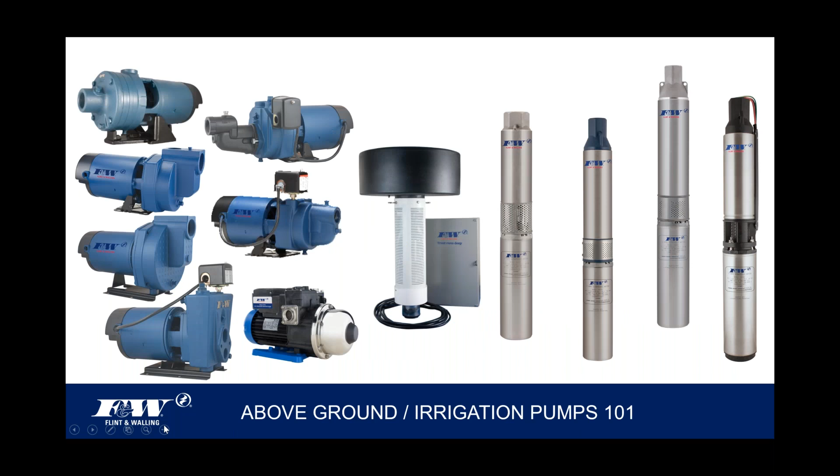So with that, we're going to go ahead and get started. Get my triggers here to work okay. Let's see. There we go. I'm going to pull a highlighter up here real quick. Okay, so

What you're going to hear today frequently is two types. When we get a brand new person coming into the industry, I'll start them off this way. I'll say there are two types of pumps associated typically with the water well and the irrigation industry. Well, one is pictured on the left-hand side of your screen, and that's what we're going to be talking about today. And these are what's called above ground pumps.

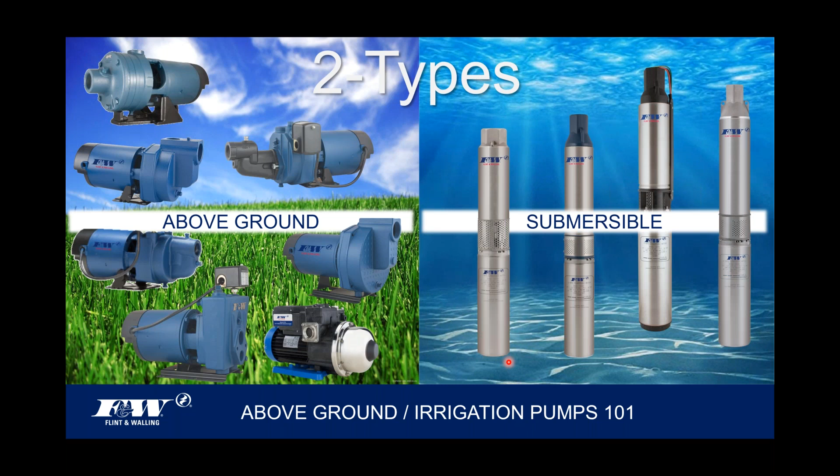And of course, the second type of pump that's typically used is referred to as submersible. I have sessions coming up in the web conference schedule that will go into submersible pumps in pretty good detail. But today, like I said, we're going to talk about above ground pumps. And in so doing, two types is something you're going to hear me say quite frequently. So with that, we'll go ahead and start with above ground pumps.

There's two types. So when we look at above ground pumps, we're going to categorize these into two categories. One is going to be referred to as jet pumps. And then, of course, the second category will be referred to as centrifugal pumps. And again, the whole objective behind this web conference today is to be able to look at these pumps visually and identify what type of pump they are. So with that, we're going to start off talking about jet pumps.

Now, I'm actually conducting this web conference from our training center, and I don't have the luxury of a preview slide, so I'm going to see these slides kind of come up at the same time you all do.

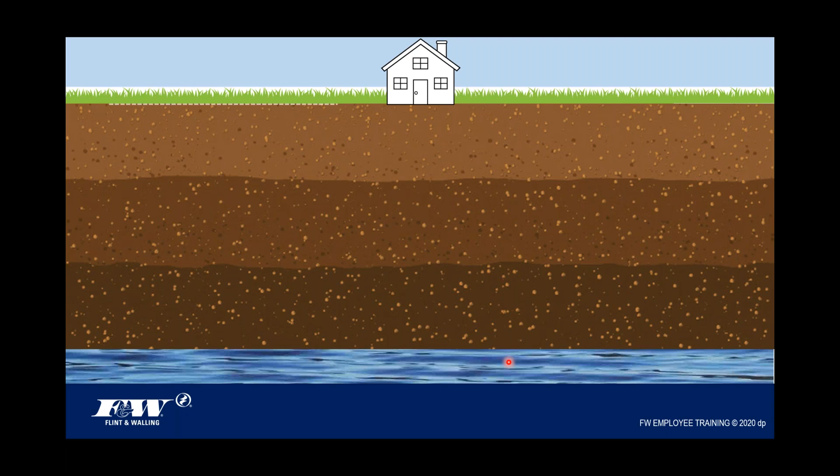But when we talk about jet pumps, when you look at a well, and that's where the majority of jet pumps are going to be used. They're typically used on well systems.

If you had a house in the country back in the 50s or 60s and you had a jet pump, that's how you got water in. But the thing that I want to talk to you about here when we talk about above ground pumps, and particularly when they're used on a well,

if you call me and want assistance in sizing a pump, and you've got a well, one of the first questions I'm going to ask is how far is it from the surface down to the water level in that well? How far is it? And that's going to be a vertical measurement, and it's going to be measured in feet.

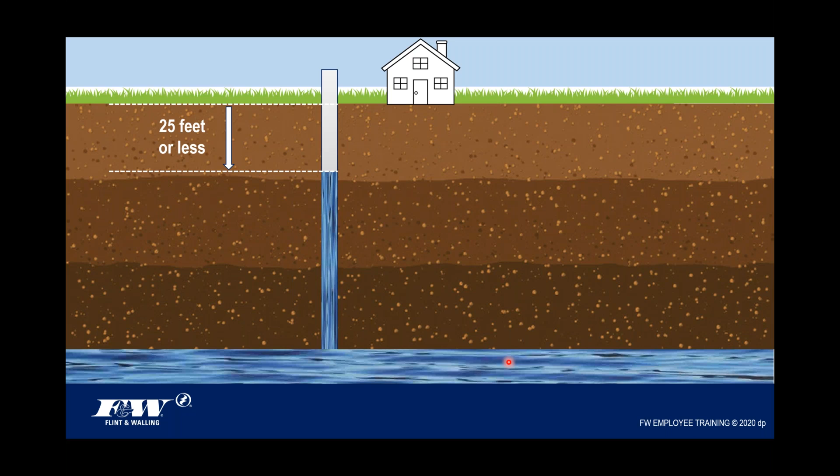So, for example, if that distance is 25 feet or less, that's going to be referred to as a shallow well. That's not a Dan Painter term. That's an industry standard term that most every pump company acknowledges. And so when we talk about shallow wells, what we're talking about is a well where the water level is less than 25 feet from the top of the well, from the top of the surface.

All right, so that's a question I'm going to ask. The second, obviously, question is if that water level is more than 25 feet away, then this well is going to be referred to as a deep well. So therein lies the difference between what is defined as a shallow well and what is defined as a deep well. And these are important to know when sizing and selecting above ground pumps. So less than 25 feet is a shallow well, more than 25 feet is a deep well.

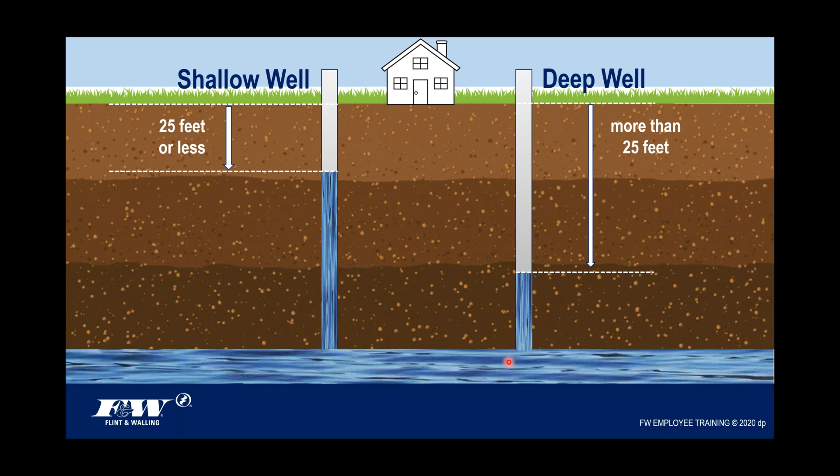Now, circling back on our first topic of above ground pumps, we're talking about jet pumps. So why is this important to know? Why is it important to know how much distance there is to water, whether it's a shallow well or a deep well? Well, there's two types of jet pumps. There is a shallow well jet pump, and there's a deep well jet pump.

So I'm going to circle back on that in just a second, but here's a question that I get asked occasionally. Why are they called jet pumps? And sometimes I've asked that question. Here in our training center, pre-COVID, we'd have this place loaded with 30, 40 people in here. And I'd throw that out there. I'd say, hey, anybody in this group know why a jet pump's called a jet pump?

And I had an old boy raise his hand in the back of the classroom one day, and he said, hey, Mr. Painter, I know why they're called a jet pump. And I said, why is that, sir? He said, well, did you ever hear one run? I kind of chuckled at that, and I said, well, I'm not sure where you're going with that. He said, well, it sounds like a damn jet. I'm thinking, well, he's not talking about our jet pump, because ours is the most quiet thing you'd ever hear run.

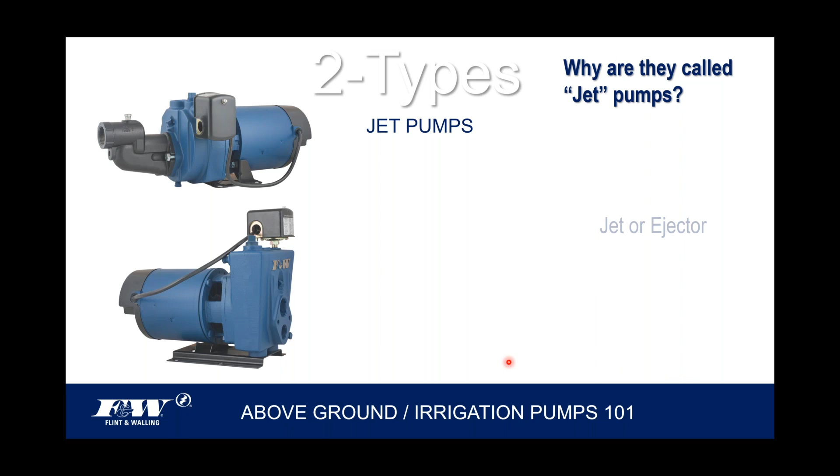So, everybody's got their own perception, and I'll be honest with you, this is an opinion I have. But if we look at why they call it a jet pump, it's because the pump must be accompanied with one or the other of the two components showing up on the right-hand side of your screen. These are called jets. Some old timers like myself might refer to these as ejectors, but nonetheless, there's two types of jets. There's a shallow well jet, and then there's a deep well jet. So up the top here is the shallow well jet.

If you look, it bolts right onto the front of the pump. So move over to the left-hand side of your screen. You can see that this shallow well jet or shallow well jet adapter bolts right to the front of the pump. And that's what makes that a shallow well jet pump, where the other one down below is referred to as a deep well jet. The shallow well jet's mounted horizontally. The deep well jet is going to be located much further down where that water source is at. And so in that case, it'll be mounted vertically in the well.

So I'm going to get back to that here in just a second. But that's why I want to know how far is it to water, so I know which jet pump to pursue, whether it's going to be a shallow well jet pump or a deep well jet pump.

So those are your two ejectors. These are jets, and they must accompany the pump in order for the pump to be able to lift water out of the well and pump water into the home. And so these jets are a component. Maybe that's a reason why they call that thing a jet pump. It's just an opinion.

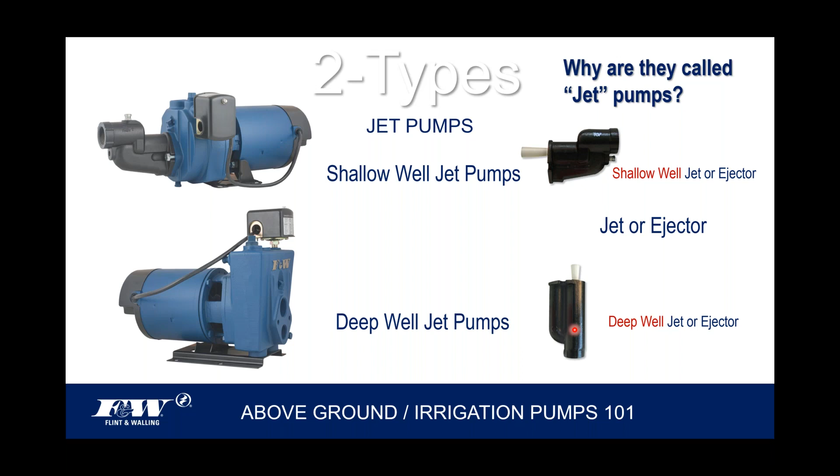Sometimes when I'm in classroom, I stand in front of the classroom and I'll kind of role play. I'll tell the folks, look, if there was a hose bib in this wall behind me and I put a four foot piece of garden hose on there and I open that hose bib all the way up, my guess is all you guys in this front row, you're going to get soaked. I can soak you all down. But back there in that second row, third row, I may get you from the waist down, from the knees down. It all depends on how much pressure's coming out of that valve.

But if I put my thumb over the end of that garden hose, and like I said, everybody's done this, now nobody in this classroom would be safe. I could shoot that water all over the whole entire classroom, soak everybody. So what happened when I put my thumb over the end of that garden hose? What changed? Here's what changed. I increased the velocity of that water coming out the end of that garden hose by restricting the opening.

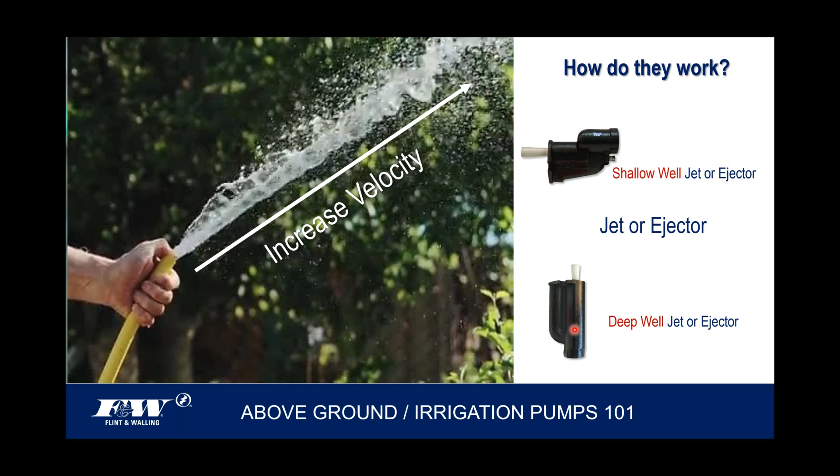Now, I'm thinking at this point, you're wondering, what the heck does this have to do with pumps? Well, let me give you one example. I'll make a little confession to you, I'm the father of 10 children. So I, in my time, have done 10 science fair projects. Let me explain one science fair project, because this is going to tell you how a jet pump can lift water out of a cistern, out of a well, whatever.

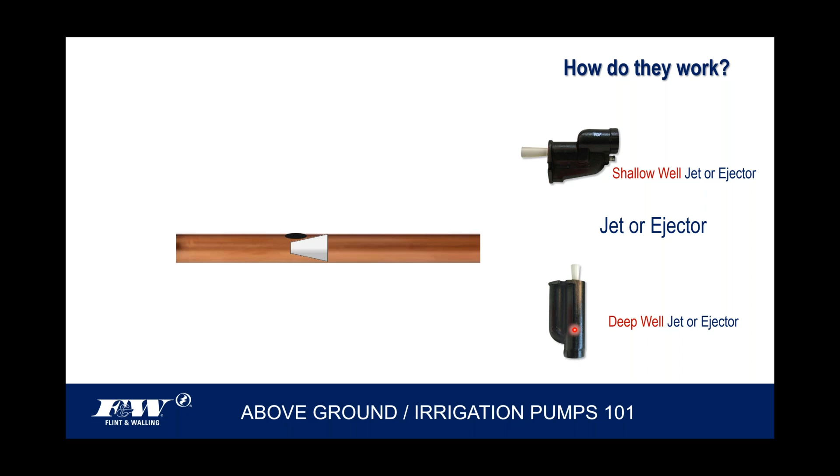I took a piece of 3/4 inch copper pipe. I don't know, this was probably 14 inches long. I drilled a hole in the top of it, and I pressed a nozzle into the inside of that copper pipe. Now, where that hole's drilled at the top, I inserted a piece of copper tubing. I kind of soldered it in there. So I created a Y-looking device here with a nozzle pressed on the inside of it.

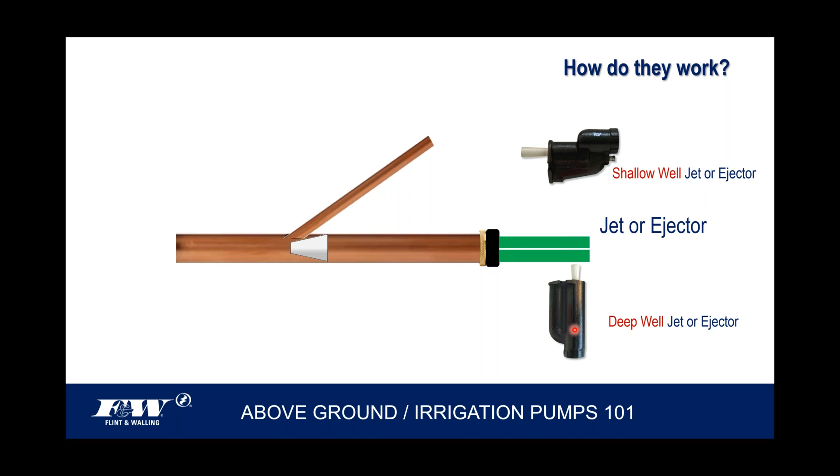I brazed a hose bib fitting on the end of that piece of copper pipe, and we put a garden hose on the end of that, and we walked this thing out in the backyard. I can't remember if it was one of my sons or my daughter, but we opened up that hose bib. And so that water came running through the hose, and it entered into that piece of copper pipe. And then once it got to that nozzle, we basically mirrored what was happening when you put your thumb over the end of that garden hose. That nozzle also restricts that opening. And as a result of that, it created velocity.

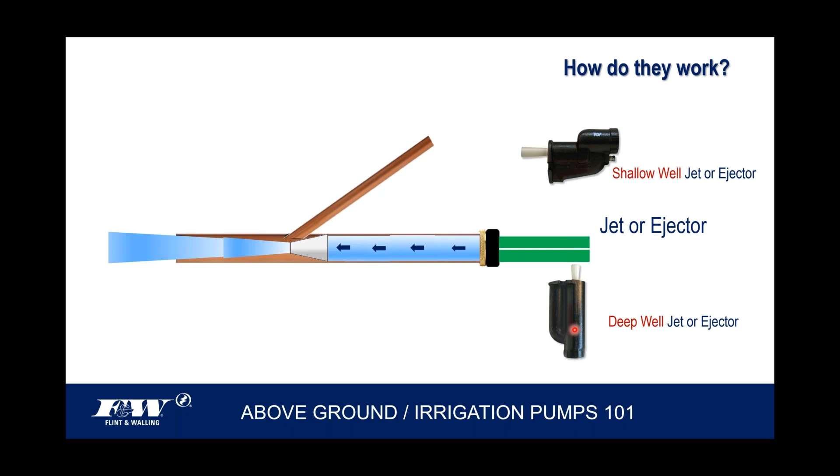We were shooting that water out of that 3/4 inch copper pipe probably 40 or 50 feet. But I asked my son or my daughter at the time, hey, while this is shooting all that water out over the grass, I want you to put your finger over that little tube. Go ahead and do that. Do you feel anything? And the response was, holy crap, yes, it's like a little vacuum cleaner. I can feel it wanting to suck my finger right down into that tube. Here is the lesson.

Velocity will create a suction or a vacuum. Let me give you more of a dated example of that. If I were in a car running down an interstate highway, and this is a little dated, and all the windows were up in the car and I lit up a cigarette, it wouldn't take 2 or 3 puffs and that whole car would be filled with smoke, right? I think everybody's probably experienced that at some point.

On the other hand, while I'm running down that highway with a car filled with smoke at 60, 70 miles an hour, all I really need to do is just crack the window a little bit. Don't have to roll it down, just crack it a little bit and watch what happens. You'll start to see all that smoke being pulled out of the car through that opening in the window. Why? Because you have a tremendous amount of velocity in the form of air moving past the opening in that window when you're running down the highway at 60 miles an hour. And like I said, it'll create that suction effect or that pulling effect.

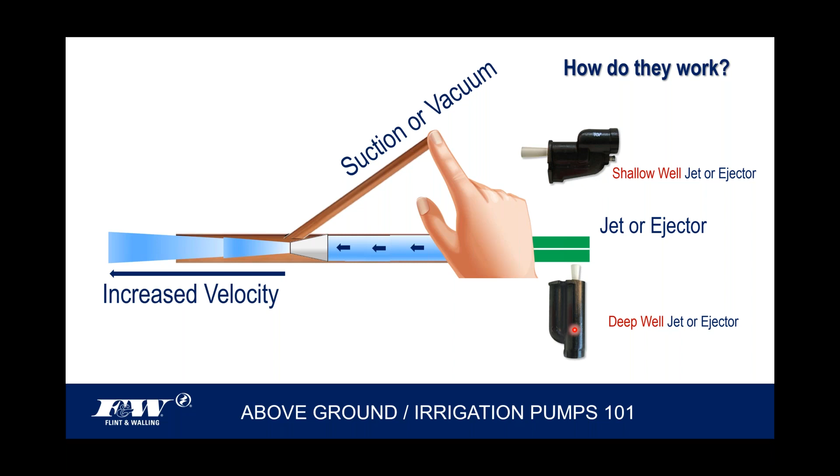We see this in racing all the time. If you're a race fan, these cars will come right back up on the back side of one another, and the lead car's the one that's doing all the work. The one that's right behind him, he can get off the gas. He's being pulled by that lead car. And so anyway, velocity creates suction.

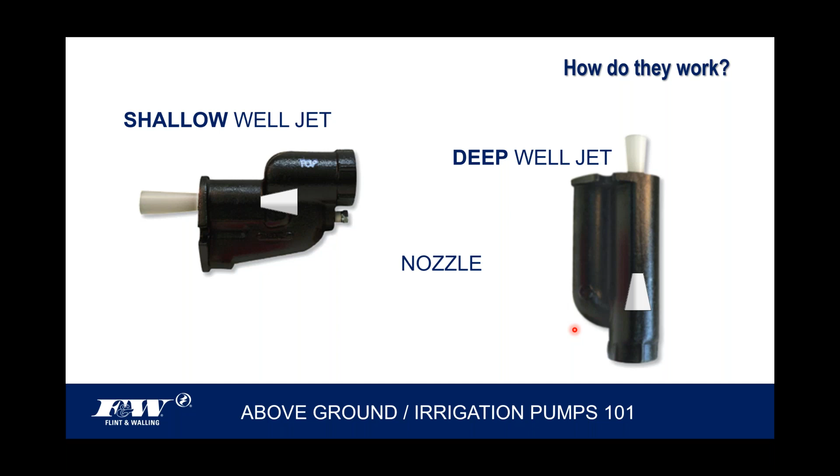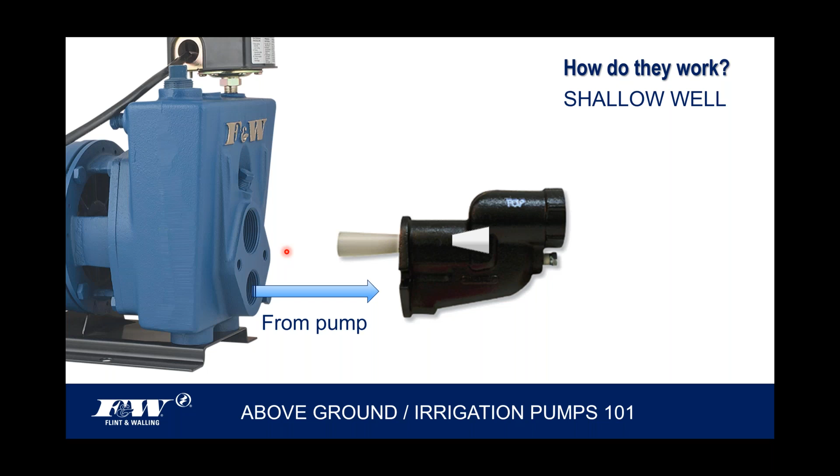Why do we do that? Because that water coming out that bottom opening is going to enter into this jet assembly. It's going to make a U-turn at the end, and it's going to be forced through that nozzle and that venturi, which creates the velocity, which pulls the water behind it. So you've got this water from the well or from the cistern that's being pulled in as this nozzle creates that velocity. So that's that pulling effect.

One thing I'll mention, because it's on my mind right now, I'd tell anybody that sells jet pumps: if you have a jet pump that is pumping very little or no water at all, the very first place I would suggest that you look is that nozzle.

So in the front, where my cursor is right now, is what's called a clean-out plug. This plug can be removed, and if any debris or anything foreign would happen to get lodged in that nozzle, listen, if that nozzle is plugged or partially plugged, then you don't create the velocity that you need. And if you don't create the velocity, you don't get the suction, and of course, then you don't get the pumping.

And so that clean-out plug is there so that should that happen, you can take that clean-out plug out, go in with a piece of copper wire, and hopefully be able to dislodge whatever may be in that nozzle without having to take this jet off the front of that pump. So that's what that's called right up front here. That's called a clean-out plug.

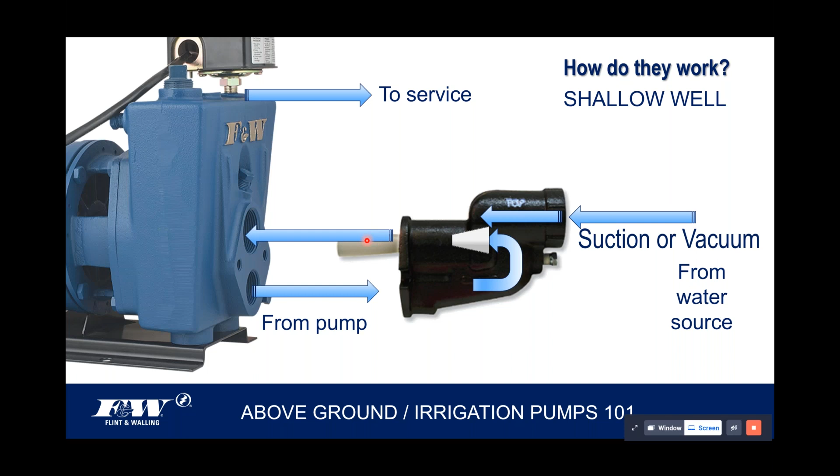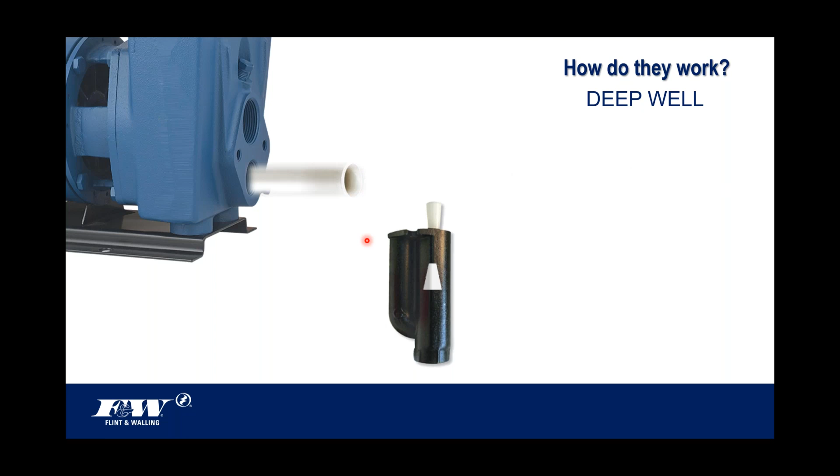In the case of a deep well jet, there's going to be two pipes running to the water source, all right? So we're going to hook a pipe up to that bottom opening, which is going to be the drive water, which is going to run down into the well near where the water level's at, and it's going to make that U-turn. This assembly is what creates that suction. So if that water is further than 25 feet away, the device that creates the suction, we better get it a little closer to that water source if we expect this pump to be able to work.

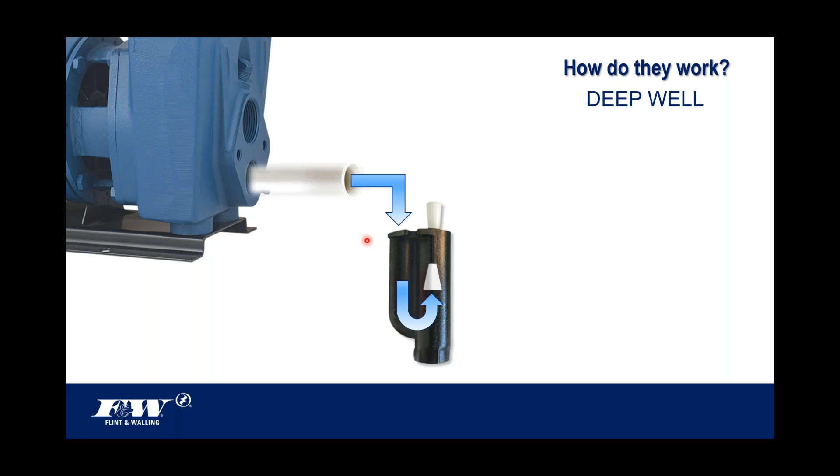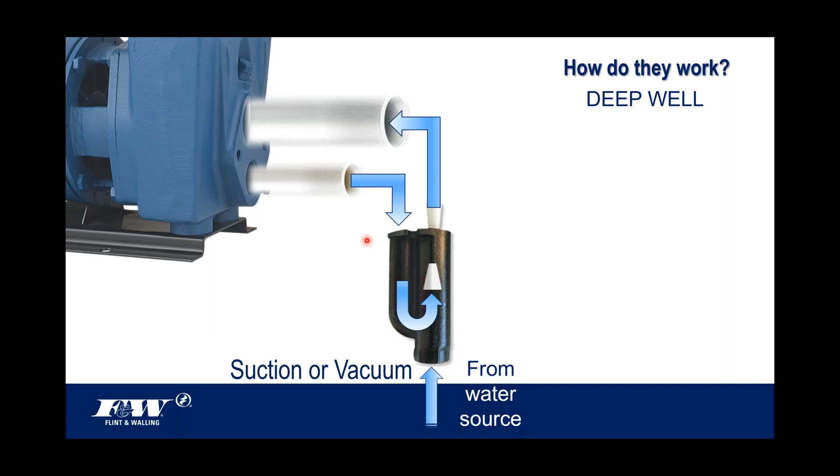So the bottom tapping of that pump there is going to tie into this deep well jet. And again, the top one is where the water is going to come out and discharge. So it's very similar to having this jet bolted right to the pump, but in this case, we have to push it down closer to the water source to get the water out of the well. And so we have to run two pipes down to that.

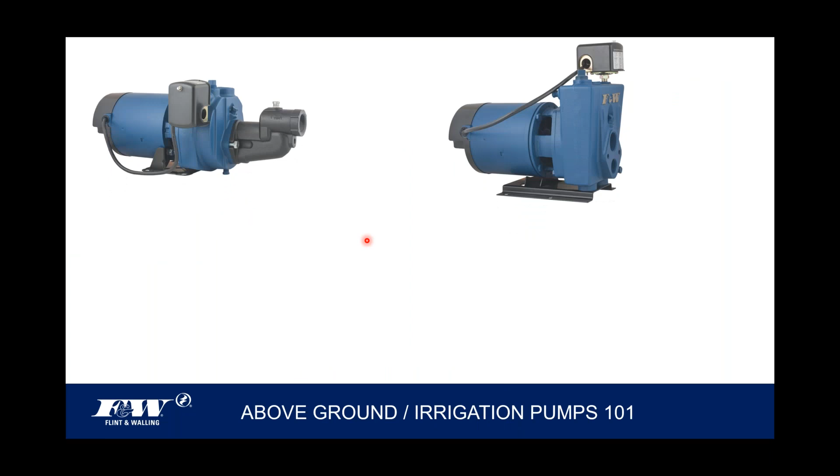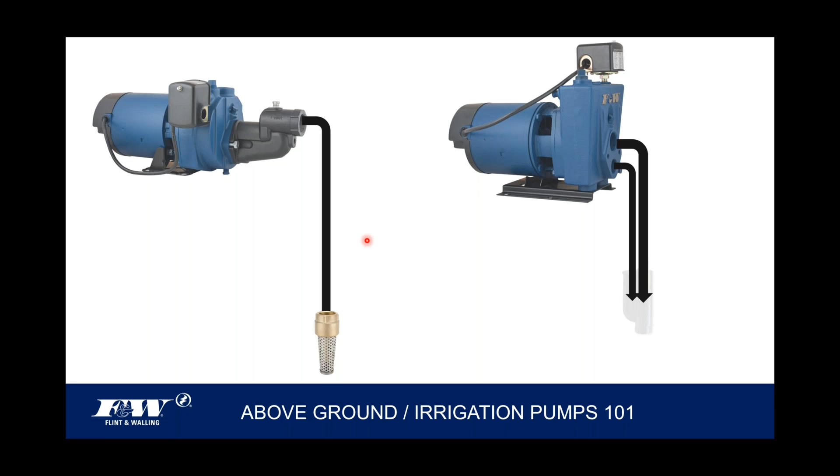So therein lies a big difference between a shallow well jet and a deep well jet. With a shallow well jet, you have one pipe that runs to the water source. That's it, just one pipe. But with a deep well jet, you've got two pipes. There's your visual. So if you see a pump with two pipes coming off the front of it, that's going to be a deep well jet pump. If it's just got the one, like you see on the left, that's a shallow well pump.

And of course, all above ground pumps pulling water from wells, cisterns, or lakes all need to have this device on the bottom of that suction line called a foot valve. A foot valve is very much like a check valve, if you know how that operates. A check valve or a foot valve will only allow water to pass through it in one direction and one direction only. Water cannot travel back down and out this screen once it's come through that foot valve.

There's a poppet in here that seats. So when that pump shuts off, that poppet seats, and it'll hold that suction line full of water. The screen, obviously, is there to eliminate any particulate that could possibly get into the pump, into the nozzle, or into the impeller area. So a foot valve is going to be on the bottom of all above ground pumps that are pulling water from, like I said, wells, cisterns, lakes.

Now I've got a little confession to make. A little while ago, I said there's two types of jet pumps, shallow well and deep well. And that's true. However, the deep well jet pumps are oftentimes referred to as convertible jets. And the reason that they call them convertible jets is I can take this pump pictured on the right-hand side of your screen, and I could bolt a shallow well jet up to that pump, right?

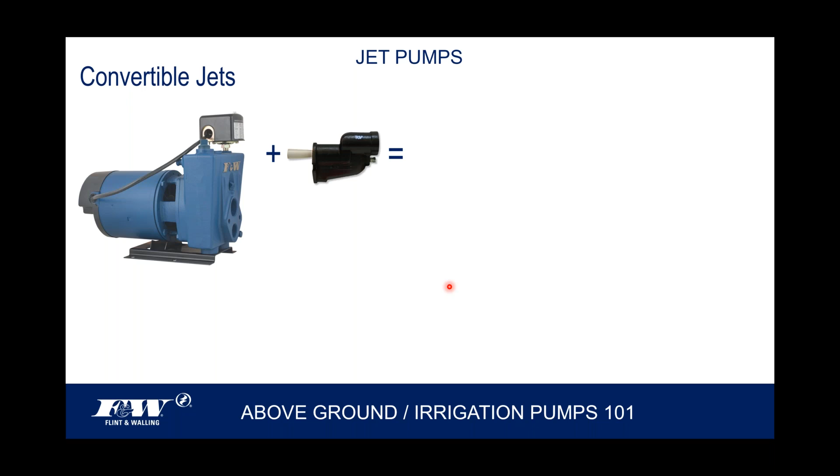I could bolt a shallow well jet up to that pump, and in so doing, I created a shallow well jet pump. Or I could take that same pump, send it out the door with a deep well jet, and now that one, upon installation, will become a deep well jet pump. So it's called a convertible pump because it can be used either as a deep or shallow well application.

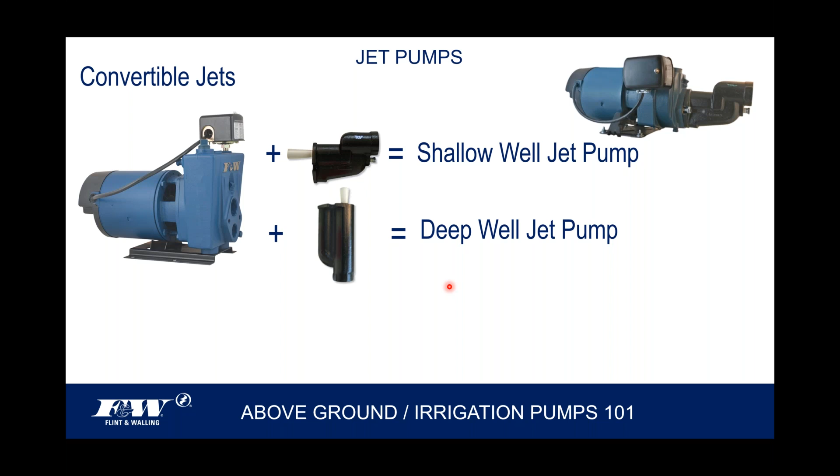In markets where we have customers that have both shallow and deep well applications, they really like the notion of a convertible pump because they can stock one pump, but yet stock both these jet assemblies, and it reduces the inventory, and it allows them the flexibility to send that pump out and operate off either a shallow well or a deep well. All right, so that's what's referred to as a convertible.

Now, there are also just shallow well only jet pumps, and we've got a lot of customers down in the Carolinas, down around Charleston, I think. There's a lot of jet pumps down there, and every one of them is a shallow well. Their water table is very shallow, and so their overwhelming jet pump sales are all shallow well jet pumps. So in addition to the convertible that can be used as shallow well or deep well, there are options to go straight up shallow well pumps.

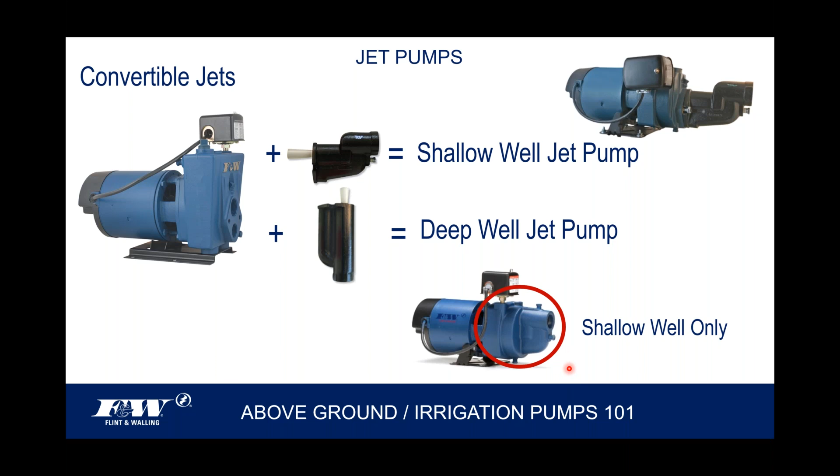And so with a straight up shallow well pump, this jet or this ejector that you see here is actually an integral part of that pump casting. All right, it doesn't come on and off like this one. It's going to be on there. So that can only be used as a shallow well pump. You'll see the little clean out plug in the front that we talked about. So that allows you to get in and clean that nozzle out. But those are straight up shallow well pumps.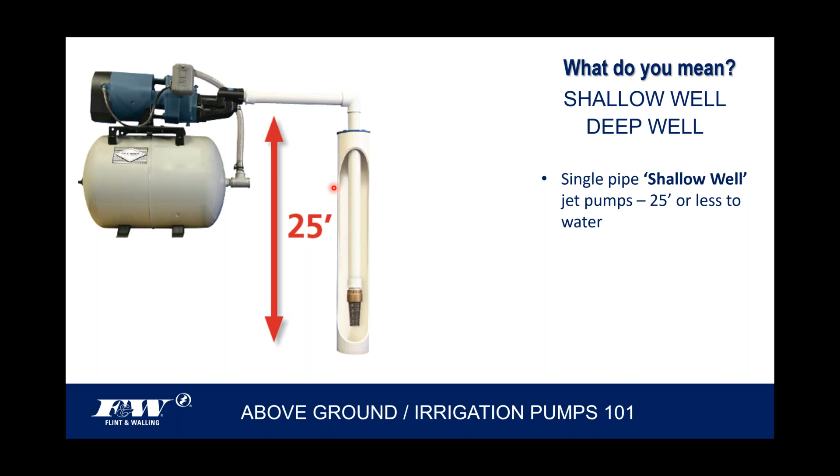So again, when we look at the difference between a shallow well pump or a deep well pump, we could say that a shallow well pump is going to be used on a single pipe system, right? One pipe running to the water source. And it's going to be used on applications where the water is less than 25 feet away from the pump. These ejectors, whether it's this shallow well or the deep well that goes down into the well, they are limited on how much lift or how much suction they produce. So therefore, that's why we have the difference between the two.

And when we talk about that lift here, when I asked you to tell me how far is it down to the water source, is it less than 25 feet or is it more than 25 feet? That's what I'm talking about, this water source here. I'm not sure if this is the right slide to bring this conversation in on, but one day when I was in classroom, I got called out on this. A contractor looked at me and he said, "No, wait a minute. That 25 feet you told us about, did I understand that you're only measuring down to the water level? That's it?" I said, "Yes, sir. That's all. I just want to know what's the distance. If you had an imaginary line come out from that shallow well pump, I'm only concerned about the vertical distance, not the horizontal, just the vertical distance. And yes, I only want you to go down to the water level."

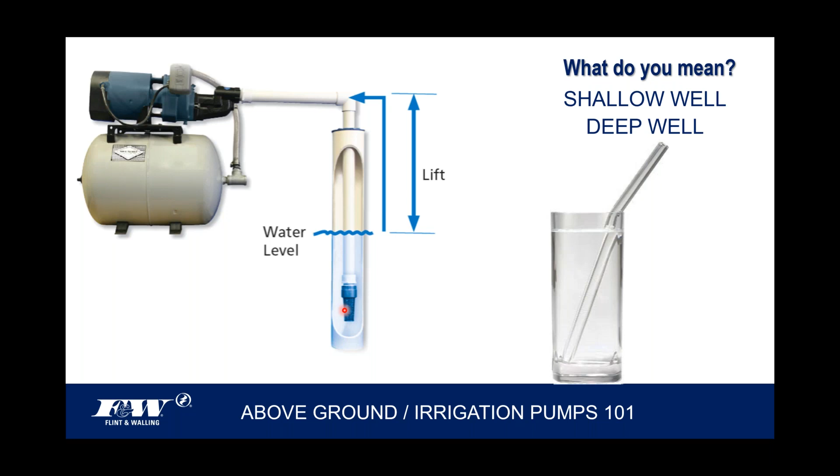He said, "But time out. That pump is getting its water through that foot valve." "Yes, you're right, sir. It is getting that water through that foot valve. What's your point?" He said, "Well, if you're bringing the water in down here and that foot valve can be several feet below the water level, why aren't you measuring from down here where the water's actually coming into that suction pipe?" I think this is the way I got past that question. I said, sir, if you had a glass of water and you filled it full, and you take a straw and you throw it down in that glass of water, let me ask you a question. Where's the water level inside that straw? And he looked at me and he said, well, it's at the same level it is in the glass. I said, you're exactly right.

So when you put this suction pipe down into this well, think of it as a straw and think of it as going into a glass, because the water will come through that foot valve and it'll seek the level inside that suction pipe that will be equal to the water level that's in the well. And sir, when you start to draw that beverage or that water out of that glass, it's already this far up in the straw. So you're only having to lift it this distance here. So when we talk about this distance from the top down to the water level, for an above ground pump, that's going to be referred to as lift. All right, lift. That pump has to lift the water before it can pump it. Next Wednesday, when we do the House of Resistance, lift is going to be a big part of that conversation.

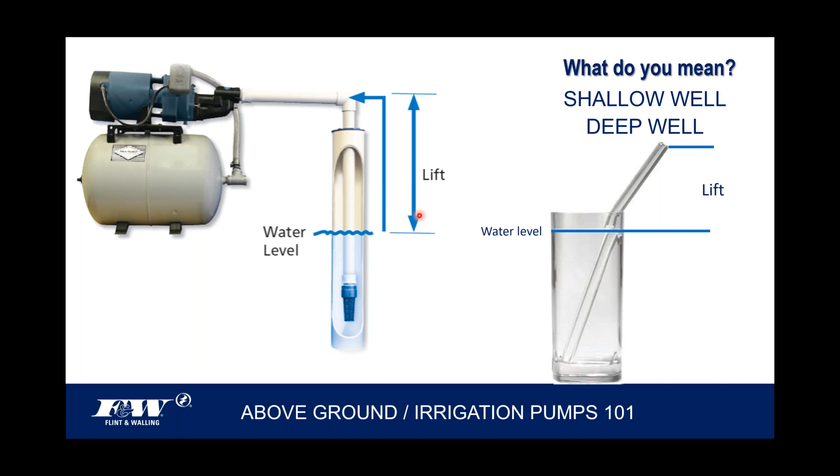All right, so moving on. With a deep well, again, you've got two pipes running to the water source, and here again is going to be your deep well jet that's going to be located down in that well somewhere. But a deep well jet can bring water up from a depth of, quite frankly, 90 feet, I believe, is a bit conservative. I think we've got deep well jet pumps here capable of lifting water 100, 110 feet. All right, but it's going to use a deep well jet to make that all happen.

So a deep well jet obviously is going to be referred to as a two-pipe system, and it'll also be referred to as more than 25 feet. All right, so there's two differences between the shallow well and the deep well jets. And with a visual look at those pumps sitting across the room, you ought to be able to tell whether there's two pipes coming out the front or just one.

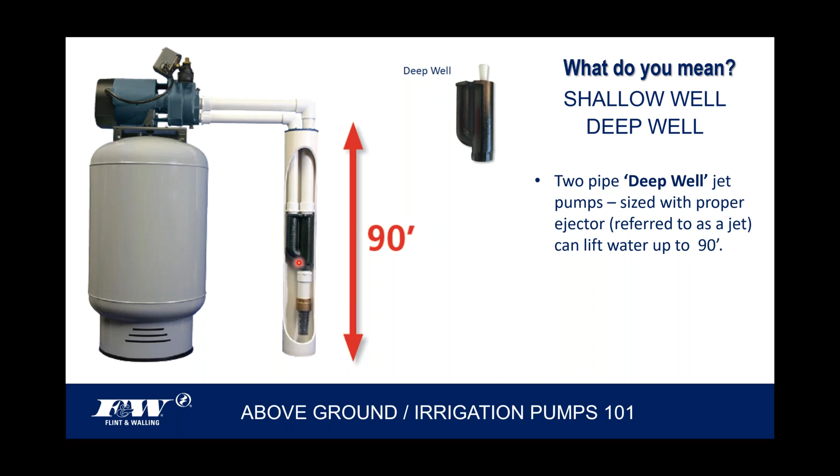All right, let's move on to the second type of above ground pumps, and these are referred to as centrifugal pumps. So we're talking about centrifugal pumps now, and guess what? There's two types of those as well, but we'll get into that in a second. Oh, yeah, we're going to get into it right now. All right, so there are two types of centrifugal pumps.

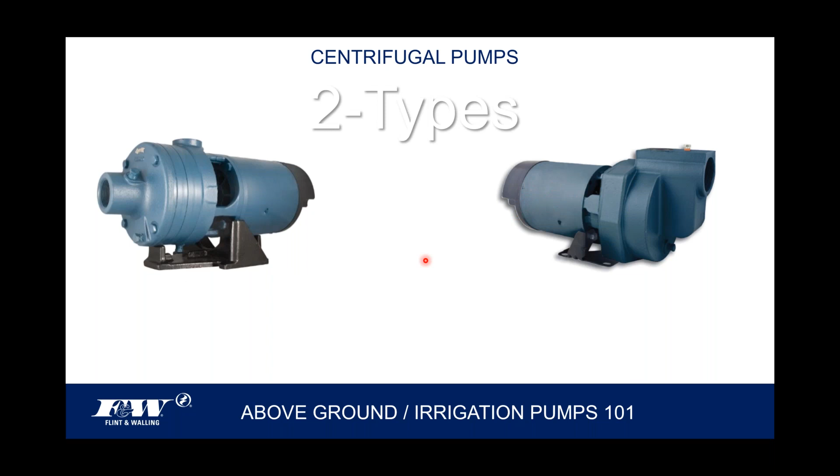The pump that's pictured on the left-hand side of the screen is referred to as a straight centrifugal. The pump on the right-hand side of the screen, that pump's referred to as a self-priming pump. Sometimes those are called lawn sprinkling pumps, this pump over here on the right, okay? So those are the two types of centrifugals. Straight centrifugal and a self-primer.

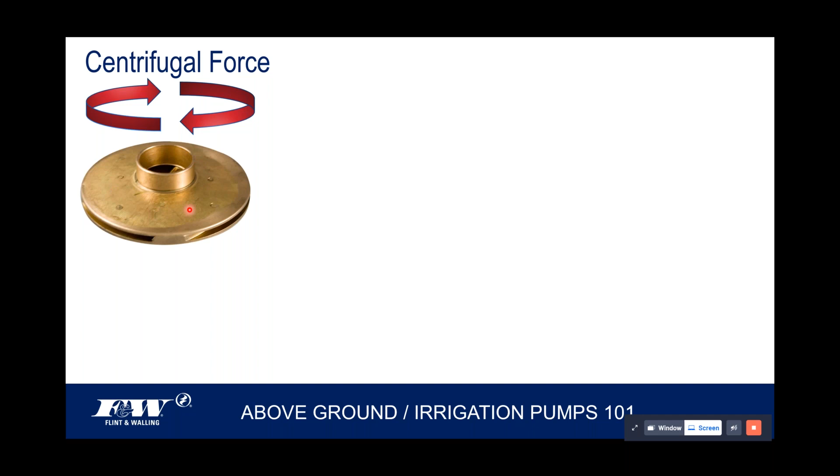I guess let's talk about centrifugal just for a second. Centrifugal force. Everybody, I think, understands what centrifugal force is all about. It's a spinning action, right? So this impeller is going to be on the motor shaft, and inside of a pump, this thing's rotating at the same rate that the motor rotates, which is about 3,450 RPMs. So it's moving very, very quickly inside that pump. And we all know that with a spinning action, it wants to throw everything to the outside.

In fact, if you want a good little chuckle tonight when you get home, go on YouTube. And once you get on YouTube, just put in two search words: merry-go-round and motorcycle. Or you can go motorcycle and merry-go-round. But you're going to pull up some videos. And these young boys come into this little children's playground, and they get on a merry-go-round, two of them, and they sit across from each other on this merry-go-round. And they're all cool and doing their thing, and then their third buddy comes over and takes his motorcycle, lays it on the ground, and engages the rear wheel with the bottom of that merry-go-round.

And so the rubber tire with that metal ring on the bottom of the merry-go-round created a little friction. When they throttled it up, I think they thought they invented sliced bread or something, but they were pretty amazed that merry-go-round would spin with that motorcycle, and they got a little bold, and they asked him to go ahead and throttle it on up. And I'll stop there. No spoiler alert, but I will say that those two got to experience centrifugal force in a very personal way, because that spinning action wants to throw everything to the outside.

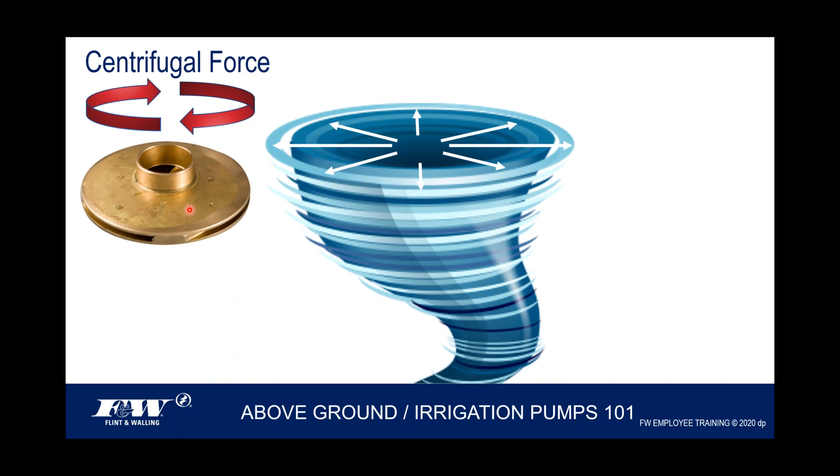That's the eye of the hurricane, just like this is the eye of the impeller. This is where the water coming from your water source is going to go into. It's going to go into the eye of that impeller. And as that impeller is spinning at 3,450 RPMs, as that water comes into the eye, just like what we've talked about, it's going to throw all that water to the outside, right?

That's what that impeller is. You can see all these vanes that are inside of that impeller. So it's going to direct that water and throw it under a lot of velocity to the outside perimeter of that impeller. Of course, when this is in a pump, that water is going to come right out and travel right out the discharge. All right.

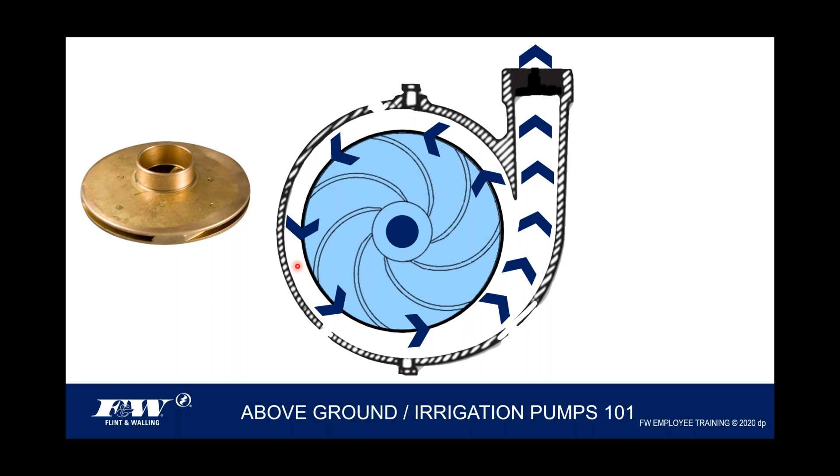A centrifugal pump is probably one of the simplest pumps that we manufacture here at Flint & Walling. It's simply an impeller that's put on a motor shaft, and then we rotate it like you see here inside of a pump housing. When it comes to these impellers, you do have a choice with some of the Flint & Walling pumps: a thermal injection molded plastic impeller like you see on the left, or a no-lead bronze impeller like you see on the right.

We manufacture the plastic impellers. We have a company in southern Indiana that we own that is a plastic injection molder. So most all the plastic components that you will see in a Flint & Walling pump are self-manufactured. We don't source those things out. But I will tell you this, injection molded plastic is a very, very precise method of molding plastic material. If you run 1,000 of these, you will create 1,000 clones that are absolutely identical to one another.

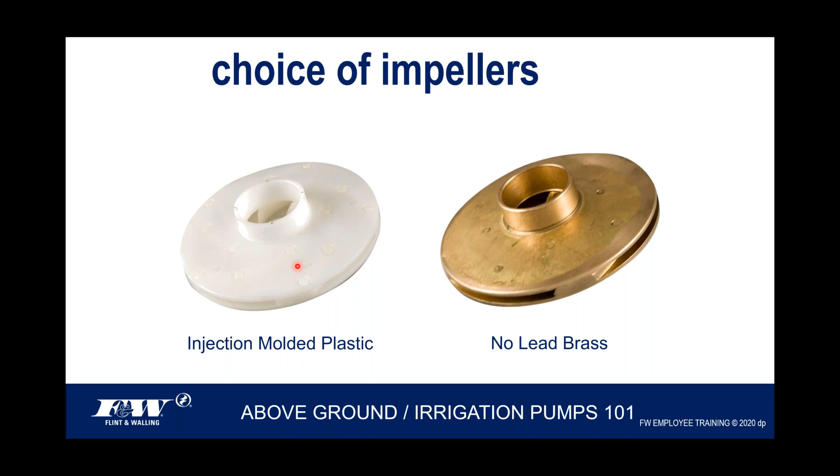On the other hand, with the no-lead bronze impeller, if you choose to go that option, it's a little different here, right? These impellers we need to balance. And so this is a 100% process that takes place here at Flint & Walling. There is not a bronze impeller that comes through this building that hasn't been on that axle. They'll put this on an axle, very much like balancing a tire. Strobe light comes on. This operator is fairly skilled because they'll know exactly where adjustments need to be made.

I tell people all the time, if you had a truck and you went out and bought a set of new tires, you would be a fool not to have those tires balanced at that time, right? Because we all know what can happen when a tire's out of balance. You're going to get excessive vibration, excessive shaking, and chances are you're going to wear something else out unless you get that fixed. With a tire, we add weight to bring it into balance. With an impeller, we do just the opposite.

So when this impeller needs to be brought into balance, they'll take it off the axle. Now you're looking at the eye side of this impeller, just like over here on the left-hand side. They'll take this impeller off and walk it over to a grinding wheel that's right next door, and they'll grind some material off the back side of the impeller, off this back side here.

So if you ever see a Flint & Walling impeller that's got grind marks on the back side, I had one guy want me to take one back one day. He said somebody deliberately, maliciously just ground the crap out of this impeller. I told him, that's how we balance those things. That's a good thing to see, not a bad thing. So he got a little lesson on balancing impellers that day. You will see scuff marks on the back of that impeller where we take some material off to bring it into balance.

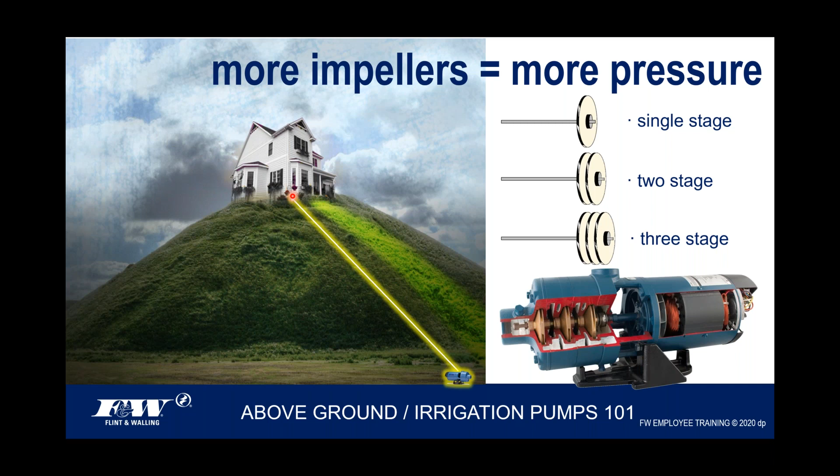With a single stage, typically you're not going to have much elevation to overcome because that pump won't produce the pressure to get it up the hill. So you're going to be relatively flat, like we are here in northern Indiana where I live. We sell a lot of single stage pumps up here because guess what? We don't have a lot of hills.

I can remember my dog ran away when I was 9 years old. I could still look out there 3 days later and see him. I mean, he's out there a long way, just a little black speck, but that's how flat we are.

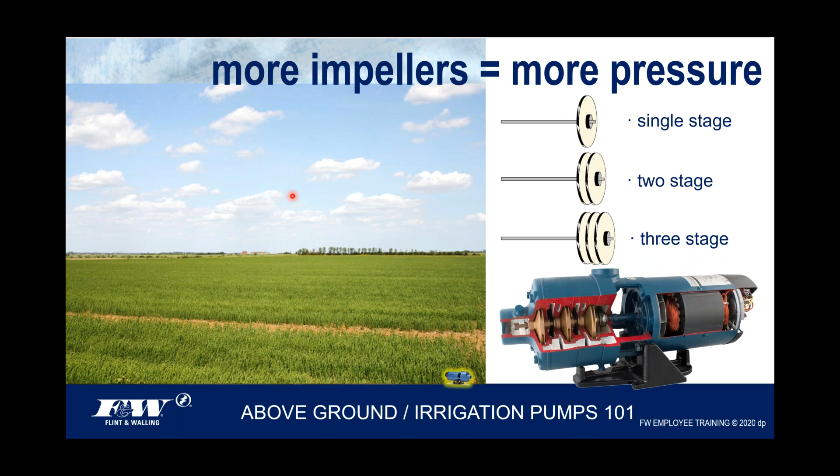So we sell a lot of single stage pumps in areas where the terrain is relatively flat. But when we get into elevation changes, terrain changes, that's when we look at multiple impellers to create that pressure to get up that hill. So what's on your screen now is a three-stage pump. There's 3 impellers in this pump, as you can see right here.

In fact, I had this pump at an irrigation show, and it was sitting on a table. That pump that you're looking at, the cutaway, I had it sitting on my little display table. And when they opened up this little convention, open house, the contractors come in, and I had a contractor walk over to my little table, and he looked at that pump, and I thought this dude was going to wet his pants. I say that figuratively, but he looked at that thing and he pointed at those impellers.

He goes, "Those are brass impellers." Are you telling me something I didn't know? Yes, I understand they're brass impellers. Why are you so excited about those? He goes, "Well, I didn't think any pump company sold pumps with bronze impellers anymore. Everybody's went to plastic." I said, "Well, we have both. We have the plastic impellers, a little more competitive in price, but we started out with these bronze impellers." He said, "I think this can solve a problem I'm having."

I said, "Well, now, what kind of problem you having?" He said, "There's a lake north of us, big lake up here called Lake Geneva. There are houses all around that lake, and they all pull water out of the lake for irrigation, and I have a lot of centrifugal pumps on that lake. They're not yours, but I'm going to tell you the problem I'm having."

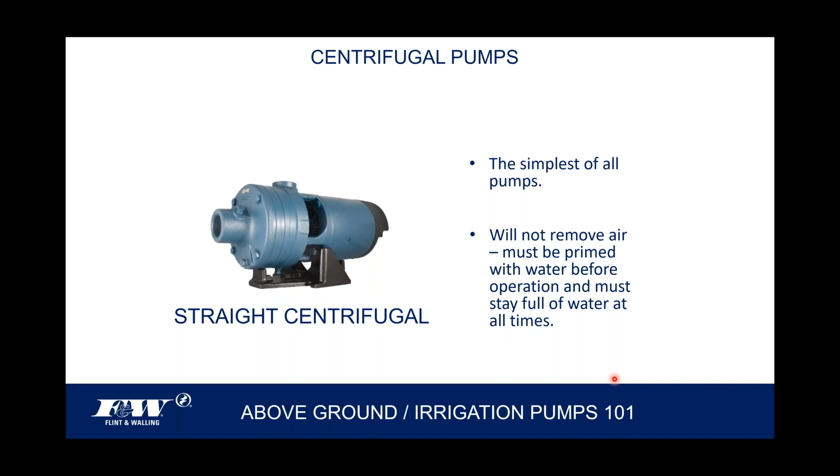However, those impellers that we looked at, whether they're plastic or whether they're bronze, one thing to always keep in mind about pump impellers is this: they will not remove air, all right? They're not like a fan blade. They don't move air. So all these pumps have to be primed with water before operation, before we fire them up, and they have to stay full of water all the time. And so that's called priming a pump.

Now we switch over to this second category of centrifugal pumps. They're referred to as self-primers, right? So let's look at the bullets there. Self-priming pumps are oftentimes referred to as lawn sprinkler pumps. I think I mentioned that earlier. But here's the important bullet. Although they are, air quotes, self-priming, all pumps, and all means all, need to be primed initially in order to pump water, including the self-priming pump.

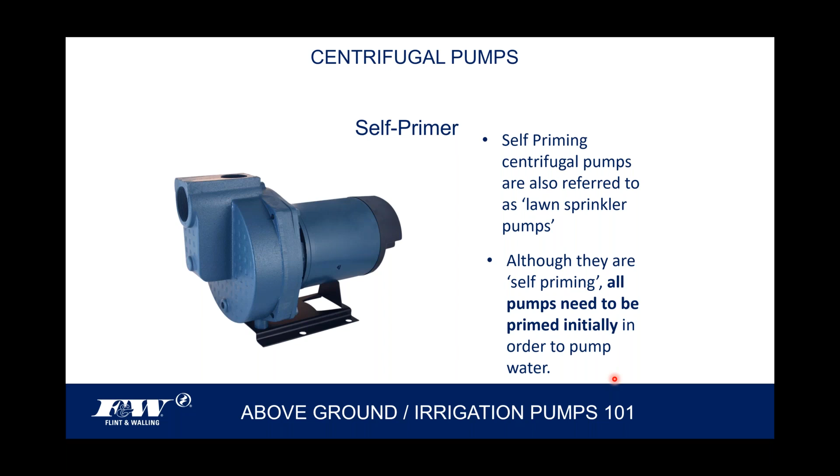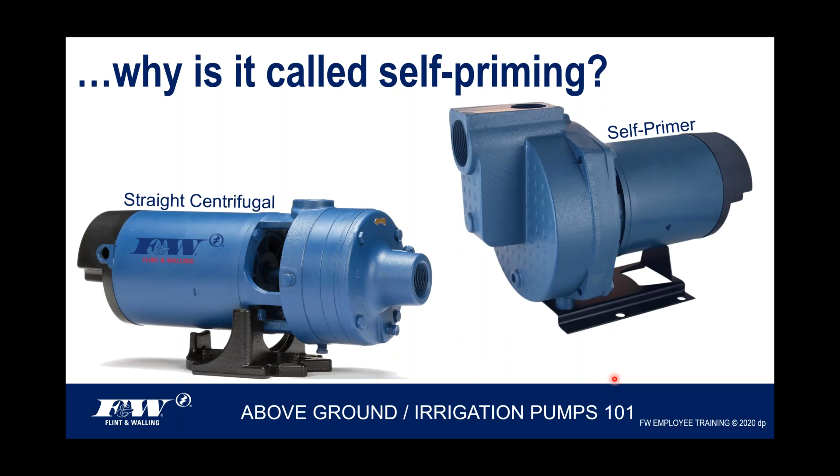Now, when we look at these two pumps, why is it called self-priming? There's your straight centrifugal, and there's your self-priming pump. Look at your visual difference. On a straight centrifugal, when the water comes from the water source right here into the suction port right here, that water will go straight into the eye of that impeller. Maybe that's why they call that a straight centrifugal.

But look at the self-priming centrifugal on the right-hand side. Look where that suction port's at. Oh, no, it's not in the center. It's way up high, almost where the discharge is located. So why do they call this a self-primer if in fact it needs to be primed initially? Well, let's just run a quick scenario.

Let's suppose that this straight centrifugal were hooked up on an irrigation system, okay? And for whatever reason, a leak developed in the irrigation system, and it drained the system down to zero pressure overnight or over the weekend. Pump wasn't called to run, and so the whole system drains down. It's conceivable that the water could drain down to the very lower portion of this suction port here.

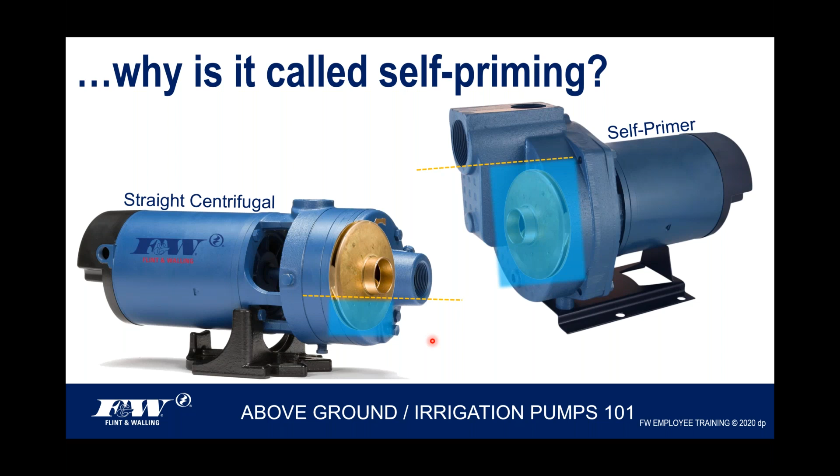Speaking of priming a pump, just real quick, the biggest advice I could give on priming a pump is have a measure of patience. All right, have a measure of patience. So let's look at this pump here. You see where the suction's at. You see where the discharge comes out. Now, some pumps, not all, will have what's called a dedicated priming port.

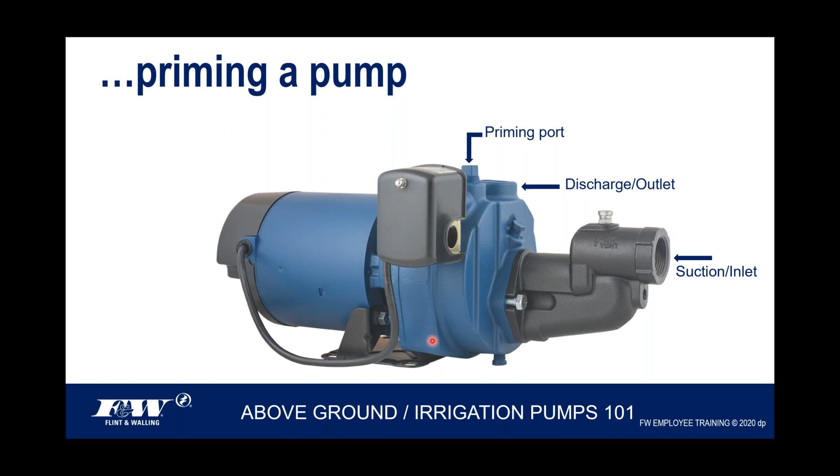Okay, so if this happens to be a shallow well jet pump right here, we can identify that pump now. And so if I'm going to prime this pump up, I'm going to get rid of that plug, put a funnel in there, and pour water into that pump. I want to fill that pump body up. I want to fill that suction line up with water.

And in the process, I want to allow time to let the air purge itself out of the water line, out of the suction line. I need to allow time for that air to purge out of there. I'll tell you something else on our jets, especially this shallow well ejector here, and you're going to see this on some of our other pumps as well.

We'll put a plug up here at the top, as you can see. If you take that plug out, you'll find that pump will prime quicker because it gives an additional place for that air to vent and get out of there. But that would be if a pump has a dedicated priming port. If it doesn't, now here's one of our centrifugal pumps. There's a plug right there. If you take that out, it'll prime quicker. So that's just a priming plug.

But here's the discharge. There's no priming port up here. So anytime you have a pump that does not have a dedicated priming port, I would strongly encourage that on the discharge side of that pump, you incorporate a T. So the water coming out of the pump can come up into this T and then run on into the service. And I'm going to put a little plug on the top of that T. So now I have a place to prime this pump.